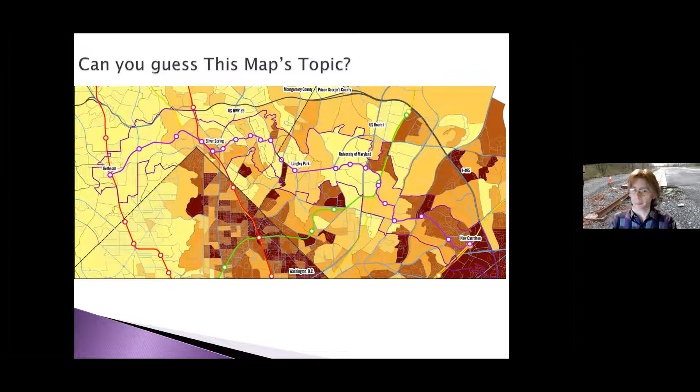So not seeing any guesses now, so I'll just go ahead and proceed. I was going to say, I thought it was the DMV, but I don't see Virginia. So this is just — yeah, that is DC and the Purple Line corridor, Montgomery, from Bethesda to New Carrollton. And we have a correct guess. Yes. So congratulations, Barbara and Jerry.

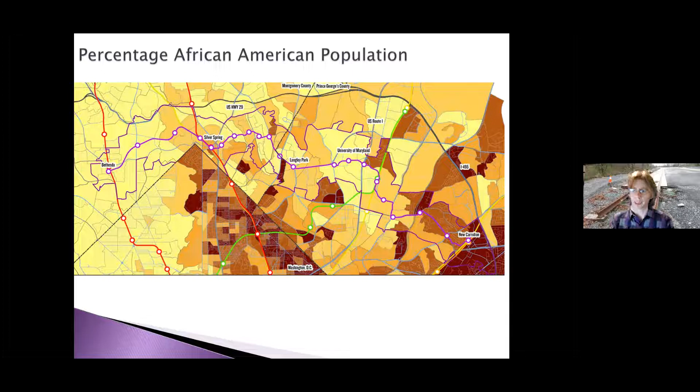Yeah, so this gets to some of the ways that our region has traditionally been segregated. Jerry Chisholm has written about theories of integration and a variety of the housing issues. One of the things that the Purple Line does by bringing that east-west connection is taking a variety of different sorts of neighborhoods that our region has and bringing them together, giving access to underserved communities and jobs. On the other hand, there's the potential for disruption and displacement as it goes. And so there are a variety of organizations - ACT has done some work here, Purple Line Corridor Coalition, and many elected officials that are trying to work to mitigate those effects and make sure the benefits are widely shared.

And again, why are we doing this? Well, commutes in the region are pretty terrible. They're different under present conditions, but I think a good amount of that will probably be bad again, hopefully, knock on wood, as we're moving more. The full effects of telecommuting and the like are going to be hard to tell for a while. But the estimate from MTA had been that Bethesda to Silver Spring during rush hour would be 40 minutes come 2030.

And you look at the percentage for the commute time with more than 60 minutes, you can see why the Purple Line can make such a big difference, particularly in areas like Langley Park and Riverdale, where - apologies - there are bus access and terminals, but you might have to make 3 transfers to actually get to a job area if you are a household without a car.

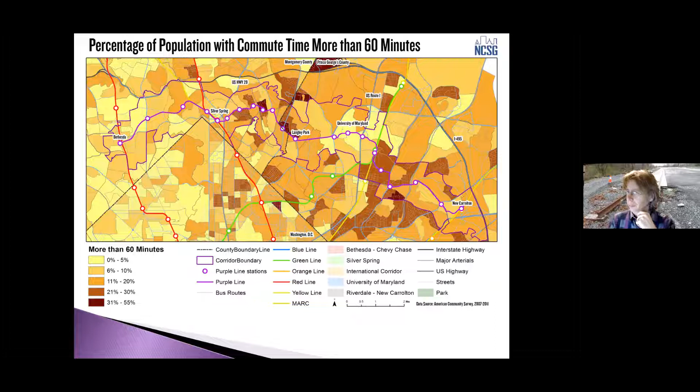And you might have to spend a good amount of time on the road if you do have one. Taking my own neighborhood, this is how the Purple Line will expand access for Long Branch. The dark purple areas are places the Long Branch neighborhood can reach within 30 minutes before and after the Purple Line. Middle purple is 45 minutes, and the larger circle is 60 minutes. So it's a vast expansion.

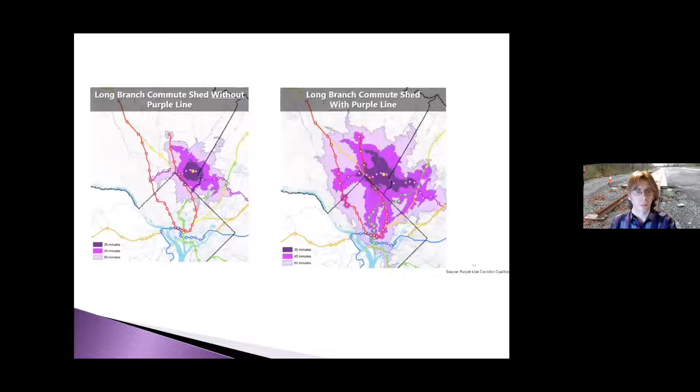And thus, starting a series of train pictures for our 7-year-old member, among others, who are both young at heart. Ultimately, the Purple Line is a jobs line and connects key economic corridors.

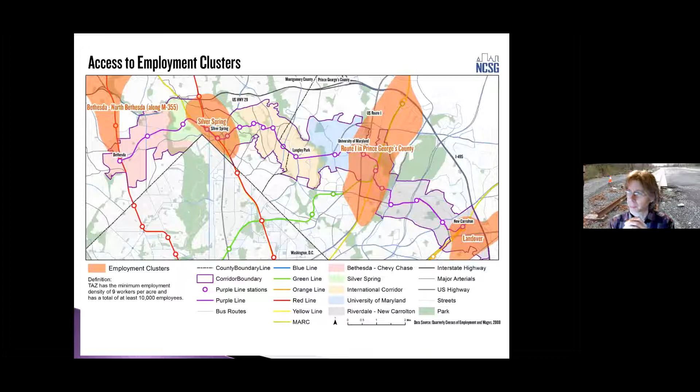Okay, so what's actually happened in 2021? MTA put together a pretty effective video of this, and I'll let that play with the sound off so you don't get a weird echo effect. Apologies.

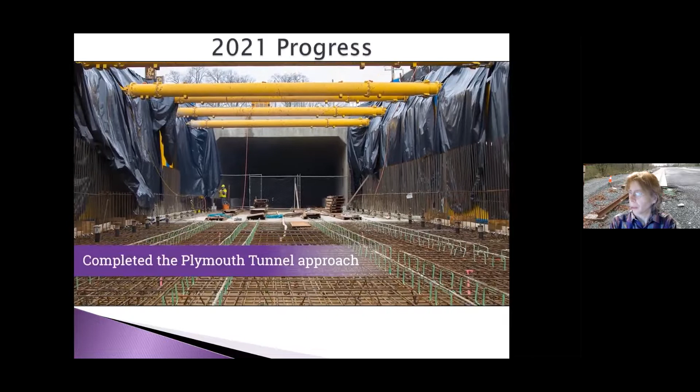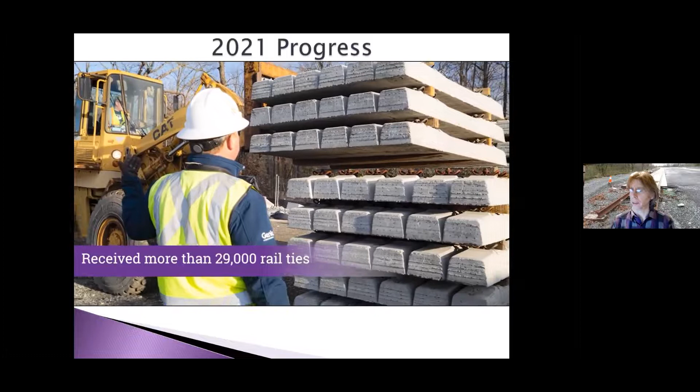So the Plymouth Tunnel approach is again near Long Branch. The breakthrough was a few years back, but now they've taken down the major construction facility, and there's much more preparation for the tunnel itself. Some of the enhancements involve things like planting trees to make up for ones lost in construction.

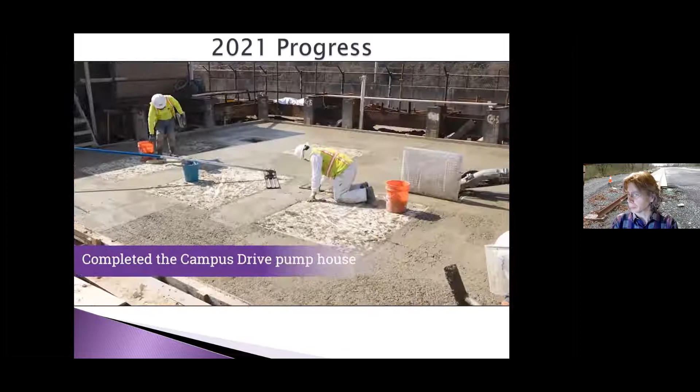Campus Drive over by College Park is actually a place we can see tracks now, if that kind of thing excites you, and it excites me.

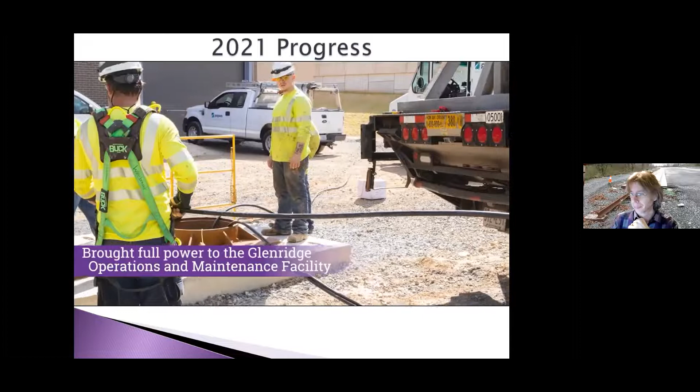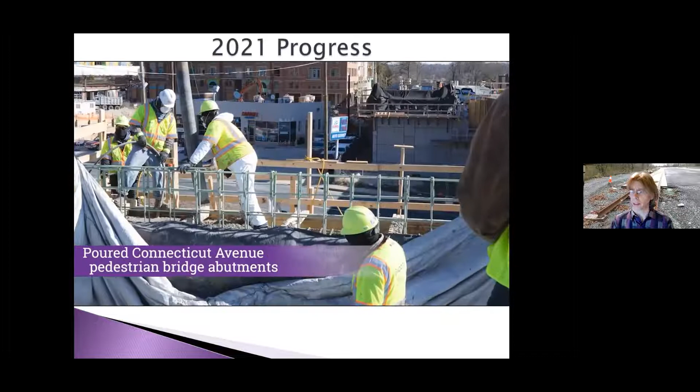The Glenridge Operations and Maintenance Facility is where the train cars will be going for testing. A good number have been constructed and sent over to the United States, but are now being completed in Elmira. As the facility gets up and running, they'll have a test track there, and they can begin to get things fully operational.

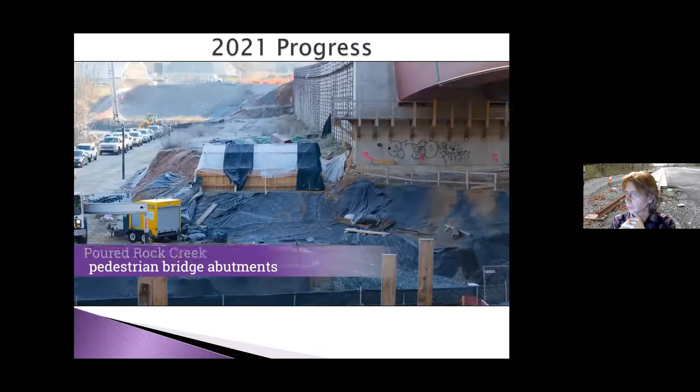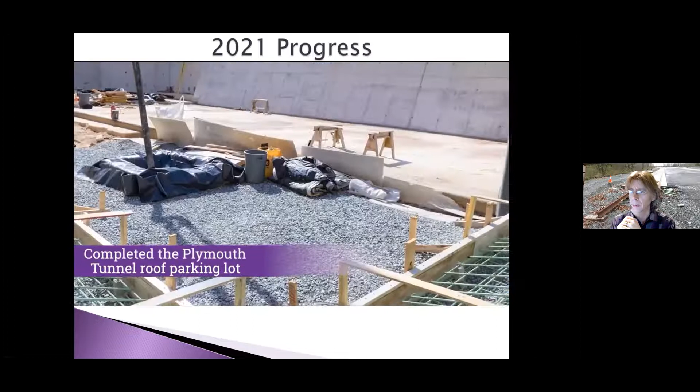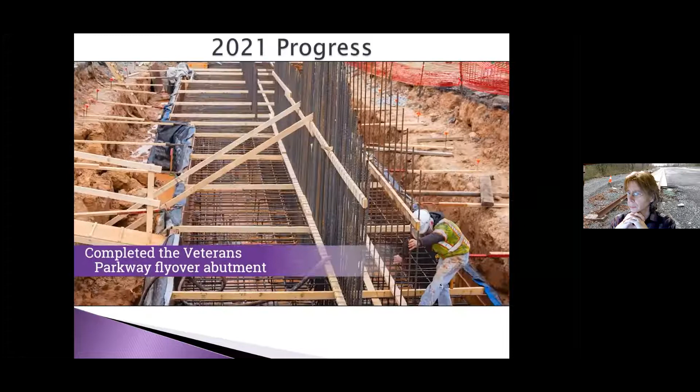A lot of the full-on bridge construction was paused with the builder having departed. But in essence, what's happening in many of these is everything that can be done directly by the state of Maryland. So full-on bridges, no, but abutments and the like, yes.

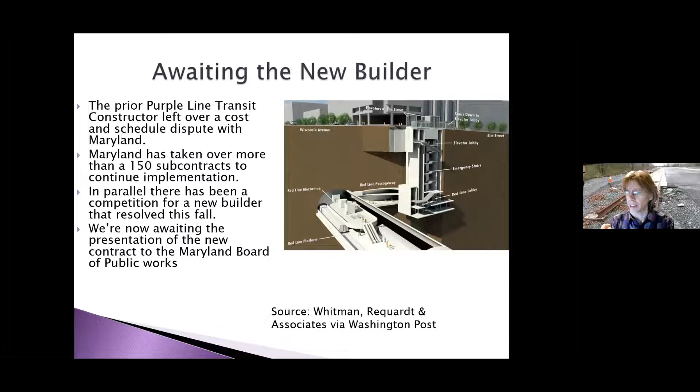So where are we now? The short version is last year was the year of competition. This is the year where we should have the new builder coming online and begin to take over a range of construction that is beyond the capability of just the state of Maryland on its own. Maryland had, over the couple of years of pause, taken on 150 subcontracts to keep implementation going, done a great deal of utility location work, and then worked with the concessionaire in the lead to actually carry out the competition for a new one.

So what's the next big step? What we'll actually be excitedly waiting for is the presentation of a contract to the Board of Public Works. The Board of Public Works is the governor, treasurer, and comptroller, a total of 3 officials. They ultimately will need to approve this to go forward. It being a major contract update, a variety of information on cost and schedule will be coming out as part of that. We'll get more details as it goes, but the full approval will bring a lot of information about Public Works. So we're all kind of eagerly awaiting that, but unfortunately I don't have any inside information on exactly what will be said there.

And the picture on this one is the Bethesda second entrance. That will be over by Bethesda Row. We did get bad news: it's going to be a bit more expensive than expected. But ultimately it's a rather essential connection, because having a second exit at all will be quite useful. If you've been to Bethesda at all, you know there's a great deal that can be quite nice to get to at Bethesda Row.

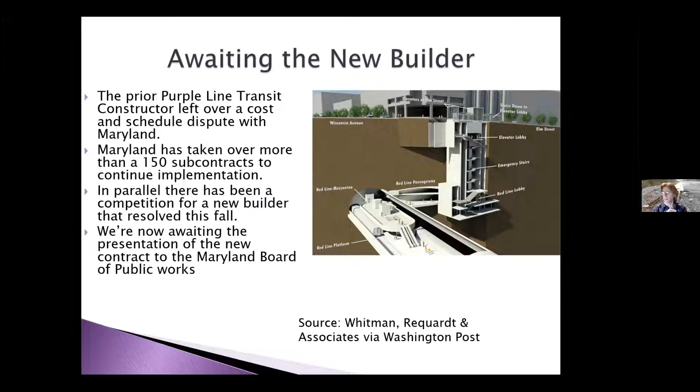It'll give direct access to the trail, in addition to being the Purple Line station, so there's a wide range of benefits. And this is one of the things where, while Montgomery County is taking over responsibility for it, you'll ultimately have the builder responsible for the implementation of this. So we can see progress on that as the constructor comes back online.

Okay, so what are our top 10 stories for 2021? So we've had a good deal of changeover.

Kevin Quinn had resigned to take on new responsibilities at Toronto, head of MTA. And then just recently, we've had Greg Slater, Secretary of Transportation, depart. On the whole, particularly Secretary Slater's departure is a bit disappointing, as he was, even in disagreement, able to connect and communicate fairly well with a wide range of elected leaders and other advocates. So we appreciate his presence.

I think that probably the amount of changeover, including also the changeover of the treasurer, is probably one of the reasons that the Board of Public Works pushes back, as there's a good number of people who need to be briefed up and come to understand the major decisions. That said, we don't expect this to actually cause any direct risk to the line. It's just a bit of disruption as you change over officials. There's been no concern of new officials being skeptics or wishing to slow things down directly.

All right, so what happened over the course of the past year, we had the 3 builders that were shortlisted. So that was Halmar International, Maryland Transit Solutions, and Tudor Perini. That was in the spring. And then we proceeded for competition.

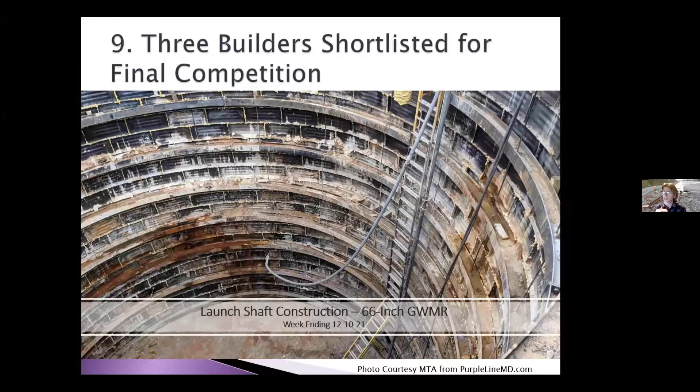The competition itself took a bit longer than was initially estimated, but this was one of those cases where it was essentially allowing time to reduce risk. Of the 3 competitors, they were given ample time to review the current state of the project, one they would be taking on in the midst of construction, and so they would obviously want a great deal of detail there. Ultimately, that process took a while, but was able to see through 2 of these competitors ultimately putting in the bid and then the final selection.

So we've had some good news for small business during this process. Thanks to Maryland General Assembly, there was a $2 million construction grant program that will help businesses that are having to deal with the extended period of construction. And Montgomery County was able to come on board with an additional $230,000. There's also been work by Maryland Purple Line itself with the business engagement team.

And that seems to be an area where they're going to continue to emphasize, trying to make connections. This is going to be important as once construction gets going more, the good news is things are moving faster. We'll get to the day where the line is there and those nearby can get the benefits of it. The bad news is that in some ways disruption can increase, just as construction has a variety of needs.

So we also got more detail on the Capital Crescent Trail plans. And courtesy of Ben Ross with his picture, I did not get his permission, so hopefully he doesn't mind. But it's a rather fun one, just cleared recently.

So it's a 2-stage construction for the Capital Crescent Trail. There's a proposal to have it go under Wisconsin. That would be rather expensive, and you'd probably need additional funding sources. The good news is with federal resources and a range of infrastructure bill funding and the like, there are opportunities to apply for those. I think that's one area where we can and should be pushing.

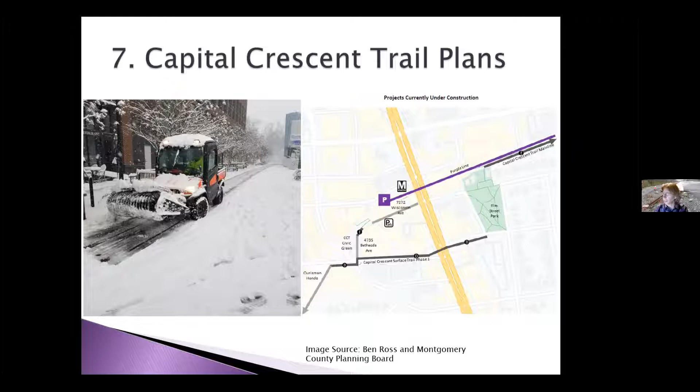There's been talk of bills for safety measures. I think Delegate Charkoudian has one up there that we're pushing for. Prince George's County is making a variety of efforts, and credit to Vic Weisberg for continuing to push on that. But that's also one that I think is somewhat limited by funding. These are all areas where hopefully some work from the infrastructure bill might be able to further credit things. And I think the General Assembly push matters.

So economic development around the corridor, things have not paused. This is the Crescent groundbreaking that happened this year. New Carrollton has had an economic development strategy. We've seen a variety of building in Silver Spring.

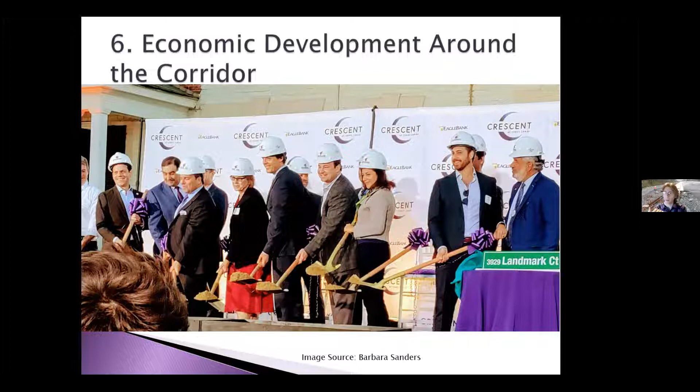So things are happening. Otherwise, the Board of Public Works approved more for consultants and private activity bonds. The consultants essentially were augmented staff for Maryland to manage construction, and they're extended through the end of the construction period. The private activity bond was choosing to buy out some of those that had funded initial financing. The idea here essentially was that Maryland was doing a bit of prepayment in order to have a few fewer cooks in the kitchen for the selection of a competitor.

So construction has continued. You've seen the video that kind of covered a variety of things that are happening now. A lot of the work you had a chance to see in person has been the utility relocation.

I see we actually have a question in the chat. Yes, time consuming, noisy.

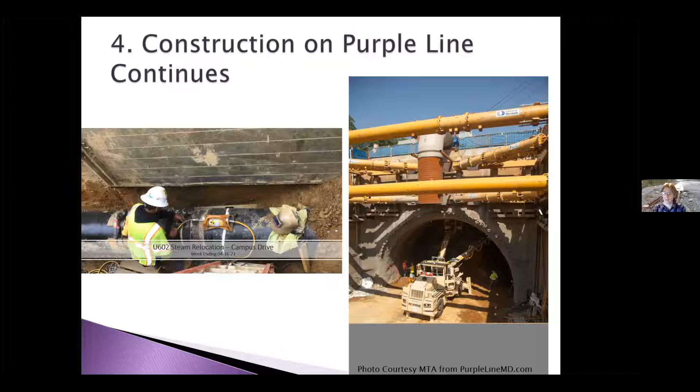And so that has been where a lot of the effort is. That's going to be continuing, but we'll find, with a new builder online, we'll finally be able to begin to shift some to other forms of construction. I don't actually have any formal estimates on how long utility reconstruction continues, but I think probably we're still going to see a good amount of it over the next year.

So the best news for me, that was exciting, came out of the road shows - additional rail cars have been acquired. Why this matters: the initial headways for the Purple Line during rush hour were going to be 7.5 minutes. It can go as low as 5 minutes under the contract. There was an option to buy additional rail cars at a set rate that had lapsed, but as part of a negotiation to bring on a new builder, there was an arrangement to buy some more upfront that will actually be able to move us lower than 7.5 minutes. I don't have a total number of what the new estimate is, but some of the progress there is quite good.

All right, we see a question from Alan Schneider: so when's the estimated opening date? We don't have it, I'll get back to that. The outside estimate of what I've heard is 2026. I think that's kind of where the full limit is if everything goes out of range. Hopefully we'll be doing better than that, but that's where things stand.

What percentage of work is completed? Total work is estimated at 10%, with design about 95% done. In terms of permits and the like, I think that's actually much more in progress, getting the I's dotted and T's crossed so a builder can proceed full steam ahead once we're on board.

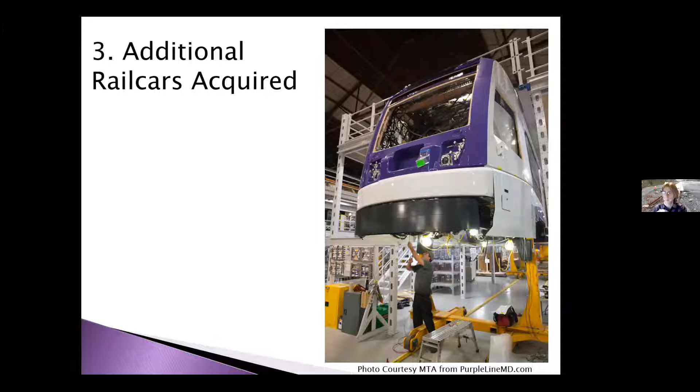So has track been laid? I've only seen College Park, and a bit more closer to New Carrollton, beyond Glenridge, on Ellin Road I think is the name. We've seen some other areas with a bit of track, but it's relatively limited still. As you saw in the video, a variety of ties are coming in, so I think we're going to be seeing more track as things move forward. But that's where we have it right now, College Park and Ellin Road.

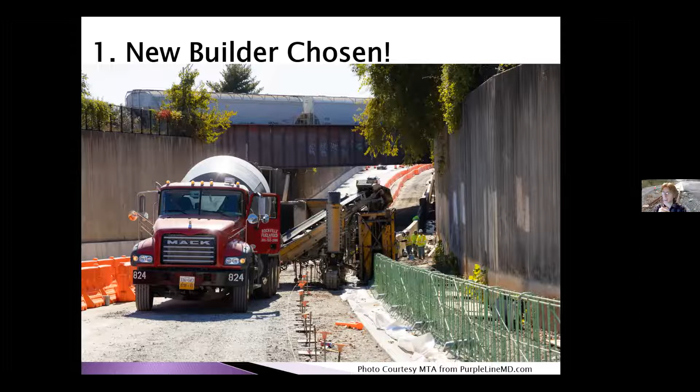So again, kind of a summary: utility relocation is 66% done. Design work, the designers stayed on board when the constructor left, so that's 95% done.

It's been an area where Purple Line President Ralph Bennett has long banged the table for a desire to get detailed schematics of what these stations would look like. We have some of the Art in Transit projects. One particularly valuable thing available if you go to some CAT meetings or the Purple Line website is a breakdown for each station of where the platform will be, where the tracks will be, how it aligns with roads and the like. So you can get a pretty good overview of what each station will look like from that.

But the final design is something we're still waiting for. And likewise, Purple Line President Ralph Bennett will repeatedly bang the drum for having signs of where each station will be, which I think, with 21 stations on the line, would have some real value.

Then finally, the stormwater permits are particularly important because, if you recall, that was one of the four major issues in dispute between the concessionaire and Maryland, or the builder and Maryland. The resolution there, other issues included of course the lawsuit, which caused almost a year of delay and $130 million in lost productivity, and also the CSX wall, which we haven't heard more about, so I think that's probably largely resolved.

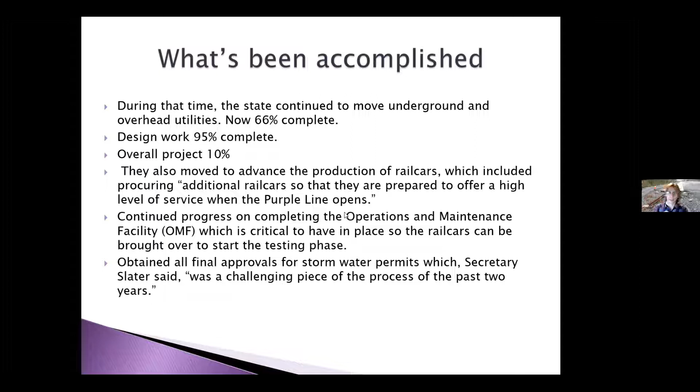Okay, so that's kind of a broad overview of what's happened in the last year of developments. We've got some more rail cars coming. The rail cars are actually largely constructed initially, which is why it's possible to add more at low risk.

Sorry, Laura Poston - I do not have a specific estimate there. It's at 66% complete. I think with the constructor on board, that should be able to progress at greater speed.

We'll find out more at the next set of CAT meetings. However, the next set of CAT meetings will probably not be in the next few months. We'll probably have them in early spring or mid-spring.

Okay, Jonathan Bernstein - the plan is to open the Silver Spring bike path once it's finished, even while railcars are being tested. We have not gotten an answer there. That was a plan from the prior constructor that had been on offer. I think that is a possibility, and that's something we're going to ask the new builder, but there are no promises there.

Okay, the CSX wall. So if you go to the Purple Line map, it goes from the Georgetown branch, which is the connection between most of Bethesda and Silver Spring. Most of the line was a historic freight line that had been used to run coal into Georgetown, hence Georgetown branch.